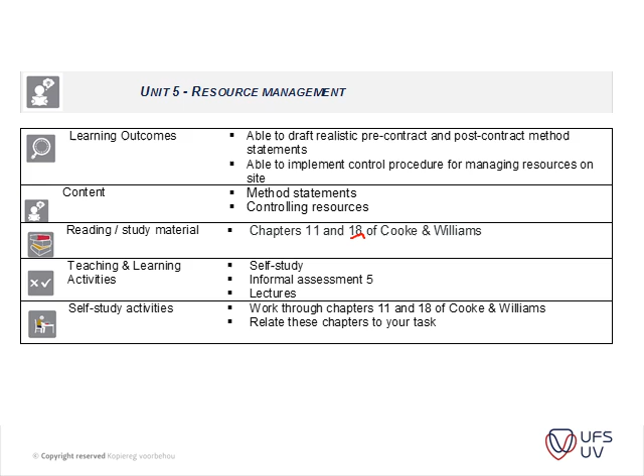So we're busy with Unit 5, Resource Management. That's where we are, and your task is due tomorrow, as discussed. That will be our semester 1 for this year. We've done a lot of tests, and the tutorials were more like the practical work we did. So just to look at where we are, we're doing chapter 18, which is our last one, looking at controlling resources.

Just as an introduction, your contractor's site manager has probably one of the toughest jobs because you can think of what he needs to manage. He needs to manage procurement, the program, the people, maybe like a marriage counselor to some people. You have quite a diverse job description. On site, you have to manage your materials, progress, quality, health and safety, and all that. Armed with a contract document, a program, and a health and safety plan, he has to manage the site. His goals are to manage time, budget, quality, and zero accidents. He also has to control project resources, considering labor, materials, plants, subcontractors, and preliminaries.

Labor we're going to look at can either be directly employed or subcontractors. Materials, he has to control waste. For the rest, refer to your study notes. We will only focus on the waste management contained in chapter 8.

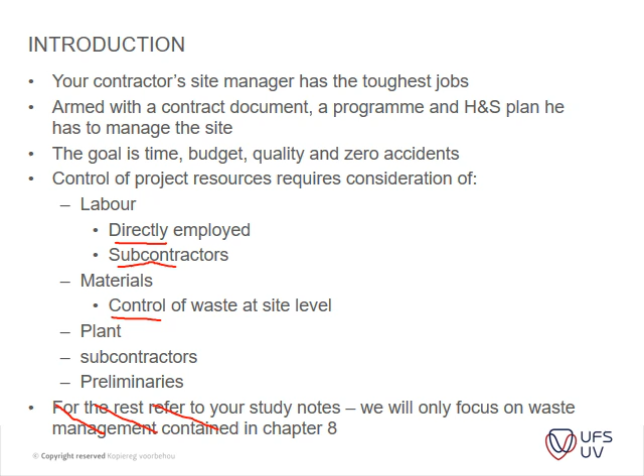So this is this little thing which I said crept in, so please just ignore that. Yesterday when I updated the notes, I saw that this was in. So that's just something that crept in.

Okay, so labor control. Like I said, you can either have directly employed labor or self-employed labor. In South Africa, it's not really self-employed labor, I think we've got a different term. We usually use labor-only contractors, guys that specialize in labor, which have the necessary insurance. They have their medicals updated, UIF, and all those items they look at.

Because you can imagine if you've got one or two projects and you suddenly have 100 people that you need to appoint, what do you do with them once the project is done? So that's where the labor-only contractor comes in. But your directly employed labor is usually the contractor.

Contractors like shop fitters and so on have specialized guys that do the work for them. For instance, that tender briefing we went to, they used tilers, plasterers. Many of the contractors will have that type of core staff on their list, the artisans and bricklayers also. What they might do is get a couple of casuals or people for that specific project to assist those artisans, guys that carry the bricks up to them. It also depends on the size of the contractor and the location.

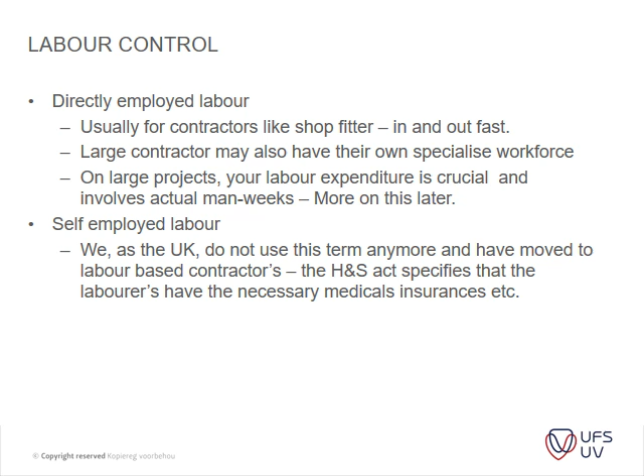Okay, so resource histograms - you did this in PQM, so I'm not going to go into too much depth of how your labor histograms work. But what I may ask you guys to do, there's an example in this book that I might post as a mini task for you to do. Don't worry, I won't do it now, I'll just check with you guys when you have a bit of time.

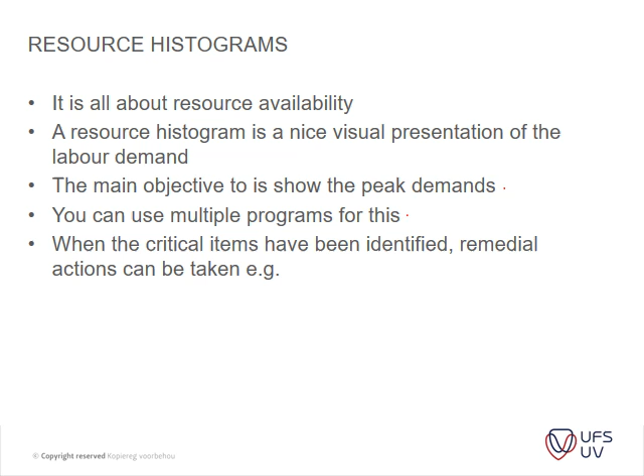When the critical items have been identified, remedial actions have to be taken, e.g. appointing more people, getting more machinery, or just letting the project run for longer. So that's the type of options that you do have.

Okay, so this one you'll probably recognize, this is from PQM from third year. I don't know if it looks familiar. It's a very simple histogram. It's a simple project where you have excavations, bedding, lay pipes, manhole excavations, manhole construction, install valves, backfill, test and commissioning. So it's a very simple little project.

But this is now your labor-only histogram. So you have 2 laborers in your teams that you can put on for trench excavation, so 2 people can work simultaneously in the trench. Your bedding, you can put in 4 people to work on that, and it takes them about 1 day.

And then you've got your manhole excavations, you need about this amount of people. Laying of pipes, you need 3 people to do that. And then you've got your manhole construction where you need 6 people, and so forth.

So you can see that all this is done on an Excel spreadsheet, and then you just add up the amount of people that you need per day. So the total amount of labor for day 1 is 2.

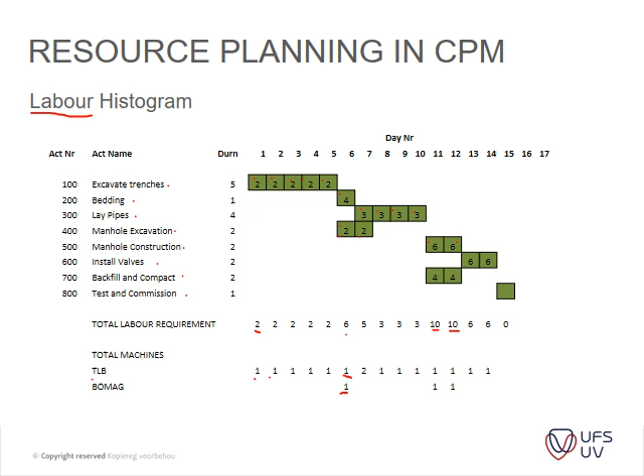Okay, so on your labor histogram, you can see we've got these 2 extremities here, but we know we only have 8 laborers available, so there's already too many laborers on that day. So you can see you need to do a resource leveling there.

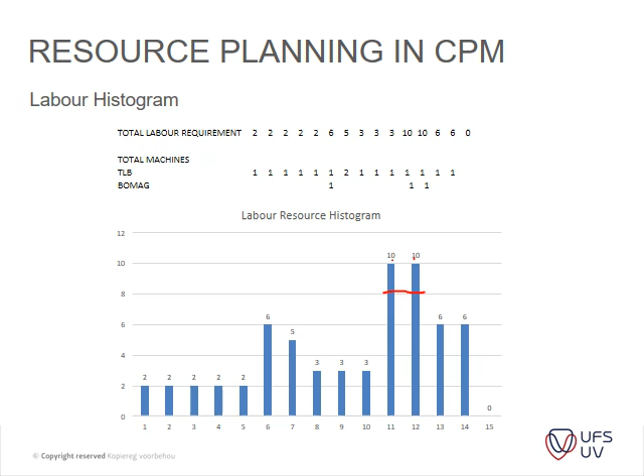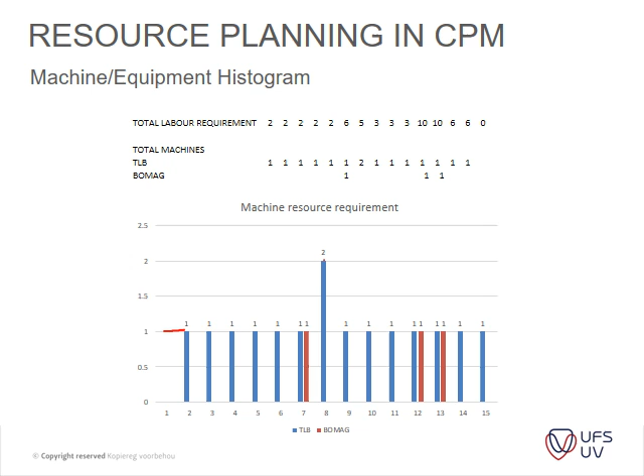Then with regard to the TLB, the same applies. You add it up, and you can see on which days you need what amount of machinery, and you can see on day 8 you actually need 2 TLBs, but you only have 1 available. So you can easily identify where you don't have enough resources.

Without going into too much depth, the simple solution is you just level out your resources and your TLBs, and what it causes is your project—I think it's the pipe laying—that just moves out one day, and together with your excavations, which moves the project by 1 day if you level it, and if you level your laborers to 8, like there.

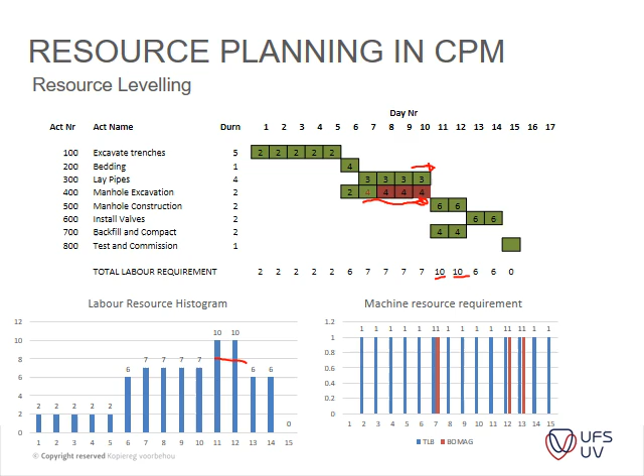Okay, I just want to see why it's still adding that up. Okay, so that's just a bit of a recap of how histograms work.

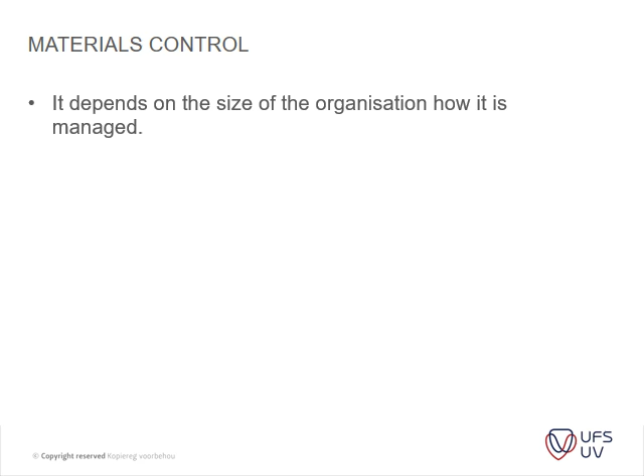And going further in materials control, that is on page 401. It depends on the size of the organization how materials are managed, whether you've got a central buying division, or if one person does everything.

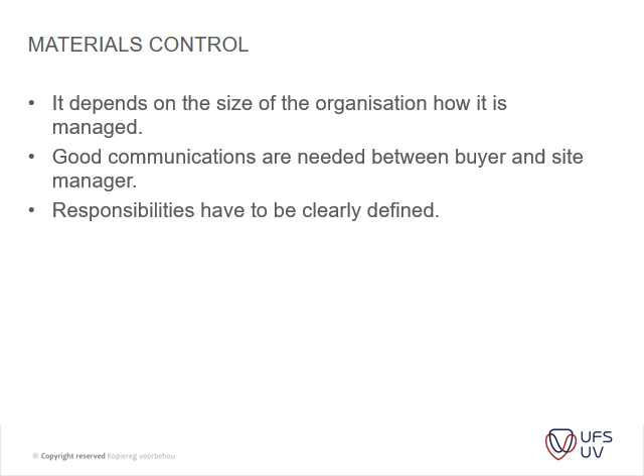Good communications are needed between buyers and site manager. That's very crucial. And then the responsibilities have to be clearly defined. Once on site, it's the responsibility of the construction manager to coordinate the communication. So that's something important to note.

And then site layout planning is crucial. That's where you're going to put your plant, where you're going to store your materials. And I think it's one of my next slides.

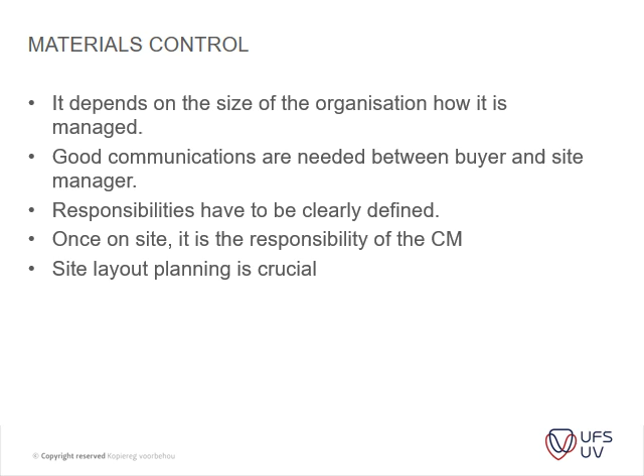There's a couple of things that you can immediately notice: if your housekeeping on site is done well, if you come onto a site and everything is nice and neat, you know they're managing their materials well. If you come onto site and you're falling over debris and bricks, broken bricks and so on, you know they're not managing their materials very well.

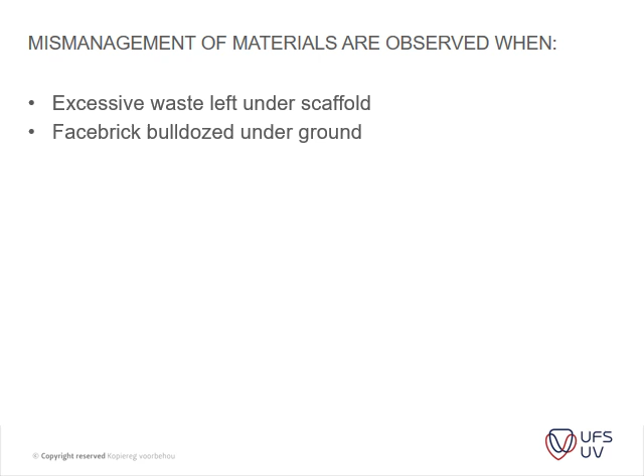Okay, excessive waste left under scaffolding. Here's actually the items which you can see. This is just a few examples. What you can see is excessive waste under scaffold, face brick bulldozed underground, material being stored on uneven ground, pallets of bricks and unloaded on unprepared ground.

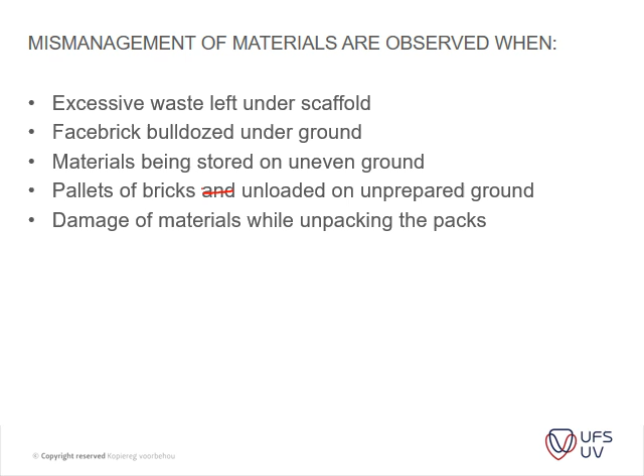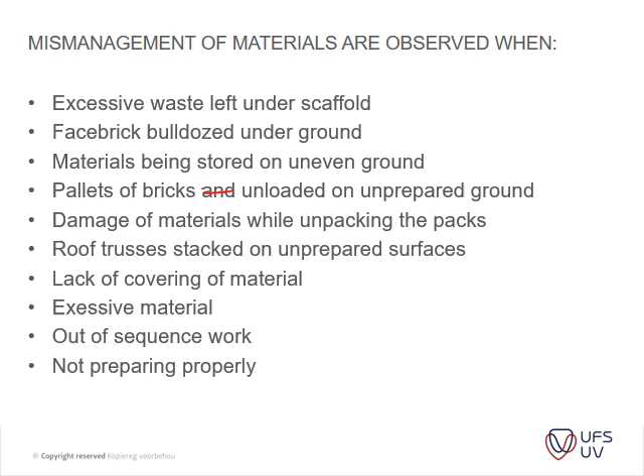This is supposed to be on. Okay, and then damage of materials by unpacking the packs, roof trusses stacked on unprepared surfaces, lack of covering of material, excessive material, out of sequence work, not preparing properly. So you can easily see when a site is not properly run, especially towards managing of materials.

Okay, then something which borders on that is waste. Historically, material waste was only a percentage on top of your rates. But these days, those percentages, if you're working on large projects, that percentage can be a lot of money in your pocket or a lot of money lost. So it is something that you need to manage very well.

New thinking suggests seeing it as a resource. The industry can benefit environmentally on performance and the bottom line.

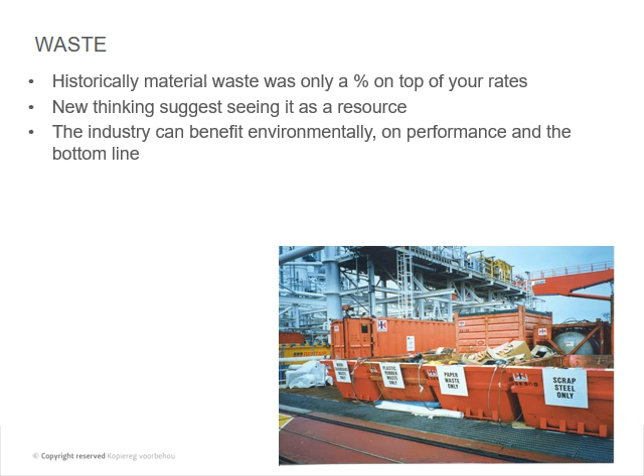Demolitions amount to about 100 million tons per year, that's now in the UK, so it's quite a lot. And then waste removal accounts for 4.5% of the company's profit. So just to put it into perspective, 4.5% is quite a lot. If you're working on a million rand worth of project, that's more or less 45,000 rand, which you could have saved or put into your pocket. So yeah, it's got a lot of money.

Then approximately 13% of all material delivered to site is wasted. That's quite a staggering amount. And that's just the waste of material. There's other items which you can manage well as well.

It's like your site offices. If you manage your tools and sheds and so on efficiently, the less containers you have on site, the less your overheads per day. So that's the stuff that you can think about.

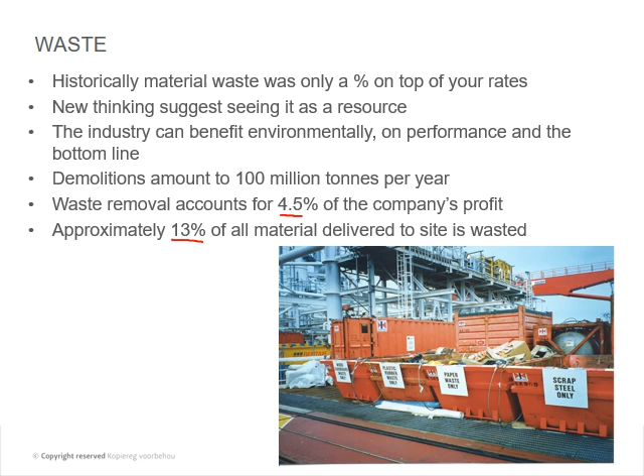The other thing is if you plan your site such that you use some of the original structure, the constructed building, to be used as storage, you can save that cost as well. So there's a whole lot of practical items that you can think of, how to save money by utilizing your progress on site and just being effective.

Okay, duty of care: the construction and demolition waste streams have been prioritized by the environmental agency. So it's basically once you've demolished something, you need to get it off site, you need to plan for it. That's the short and long of it. You can't just demolish something and not have a plan of how to clean your site. Waste streams should be managed safely and without risk to human health.

And then the waste may consist of metals, asphalt, tar, concrete, brick, tiles, etc. And there's actually money to be made out of some of these demolitions. Sometimes you can sell your hard...

Or some of your — I can't remember what it's called in English now — but some of your demolitions you can use for fill in other areas. If you've got a contractor that has a lot of fill to do and he can use that demolition work, then you can actually sell it to them. So remember that, don't just pay money and go and dump it at the nearest site. You can actually save or make money from that. Like for instance, your tar waste, you can reuse for other applications also.

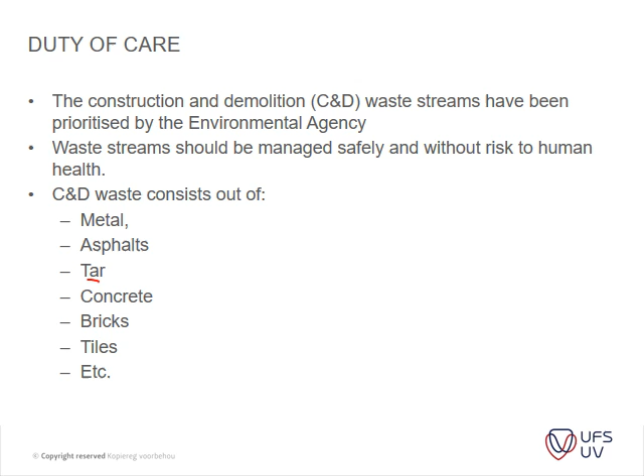Okay, duty of care. Construction and demolition waste is normally classified as commercial or industrial waste. Hazardous waste, which requires pre-consignment, is for instance your asbestos, chemicals, oils, contaminated soils, and so on. I've worked on one project where we had to take off asbestos. It's a schlep. There's only like 4 contractors in the country that do it, so it's a highly specialized job, and they usually ask a lot of money for it.

So if you're doing the pricing on a project and you see there's asbestos, immediately start asking questions: is there enough money allowed for it? Identify it as a risk whenever you're pricing your documents. Okay, then we have a legal duty of care. If we know that we're going to work with asbestos, the other risk is your laborers, exposing them to that.

It might not be that your personnel picks up a little strand of asbestos on that specific site, but 5 years down the line he gets asbestosis, and he says, oh, I worked on that project, that's probably where I got it, even though he might have got it from somewhere else. So just see it in that light. So you've got a duty of care to actually look after your personnel's health.

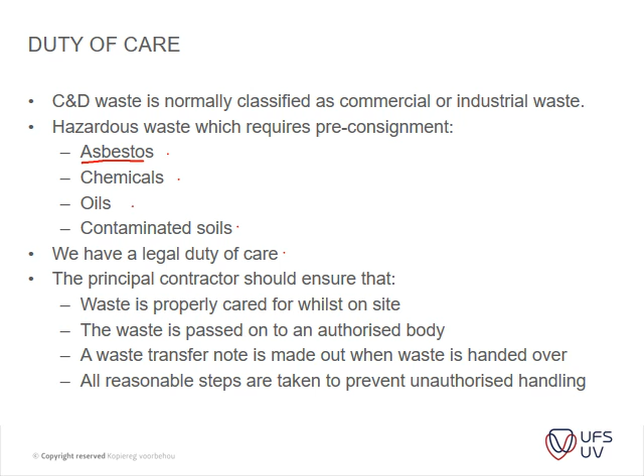Okay, then the principal contractor should ensure that waste is properly cared for whilst on site. Waste is passed on to an authorized body. A waste transfer note is to be made out when waste is handed over. All reasonable steps are taken to prevent unauthorized handling.

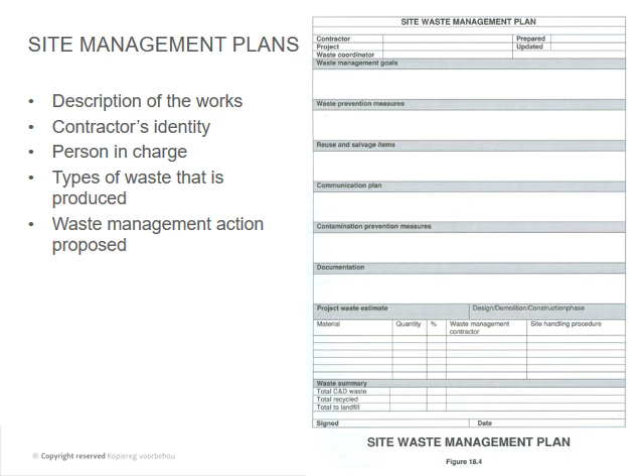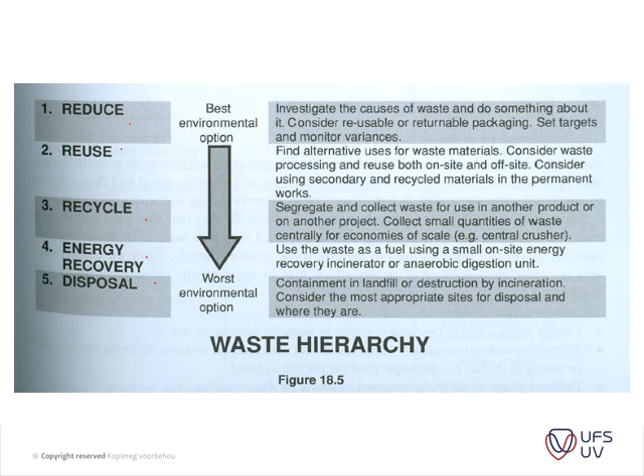Okay, site management plan. Here's a nice example that you guys can use. It's description of the works, contractor's identity, person in charge, type of waste that is produced, waste management action proposed. So pretty straightforward, you guys can have a look at it. Okay, a waste hierarchy. Waste can either be reduced, reused, recycled, energy recovered, or disposed of. So that's also a nice little question to ask on waste. And obviously you need to explain what each one is.

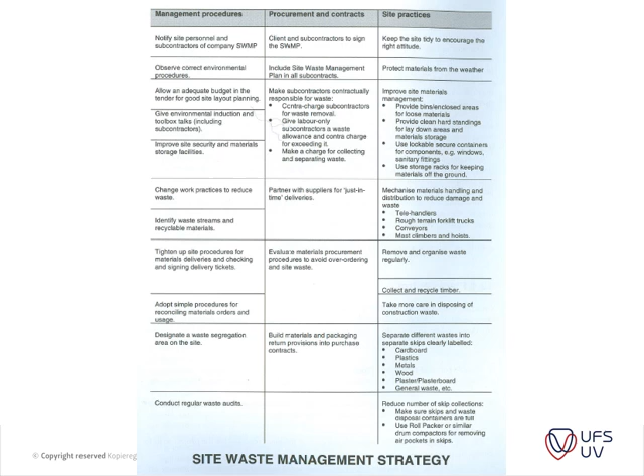Okay, then improving your management of waste. Managers have to be proactive in planning and managing materials, ordering, delivery, handling and storage. Waste is caused by design waste, takeoff specification waste, delivery waste, site waste. Waste management should be integrated with everyday thinking. It will have a positive impact on the contractor's profit margin. Materials have to be managed properly. Incentives to managers have to be put into place, and company materials management policies, etc. It will prevent health and safety problems as well.

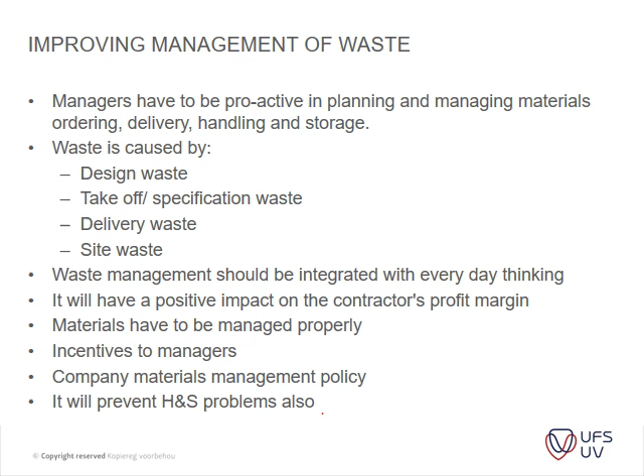Okay, then we get to subcontractors. This is now very important for me. You've got subcontractors, you've got pre-tender planning, and then you've got during-construction contract planning. So figure 18.8 is important. It shows the relationship between your planning and your actual control on site.

So firstly, if you think back to our tender briefing last week Friday, those guys will have to obtain quotes now from their suppliers, so they're at this stage, and then they need to compile the shortlist, subcontractors register, subcontractor selection criteria, obtain quotations. If it's a large company, usually those guys have to be on their vendor lists. So if it's something specialized, they've got a whole lot of red tape to get quotes from other guys and get them onto their registers.

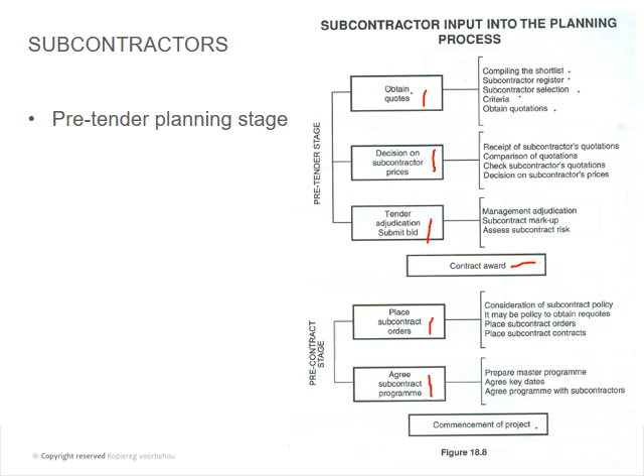Okay, so this is also very important, the information contained in here. You will see in your books there's a whole lot of checklists. Just read through those. But the most important items are actually contained in these figures. So again, going back to my rule of thumb: know the headings, and then you can hold on to that. In Afrikaans, ken jy opskrifte gorrel die res. But the main thing is, if you need to gorrel, you need to understand.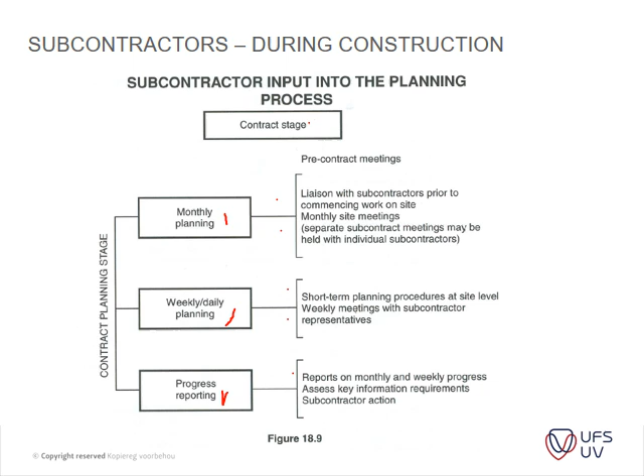Okay, subcontractors continued. These days, subcontractors may be responsible for their own program, and they are. For instance, on Amelia, where we worked, the plumbing contractors had to submit their own program, and that had to slot in underneath the main contractor's program.

Then it's a good idea to keep stock of the price, quality, workmanship standards, cooperation and time program performance of subcontractors. I've seen guys with vendors and subcontractors actually have a scorecard and a rating on them, so they can move up and down, and that's usually very confidential information. In large companies that's very crucial information, because if you're working on large projects and have to evaluate a lot of subcontractors, the guys usually look at their ratings for this guy in this area and so on. So it does become quite complex.

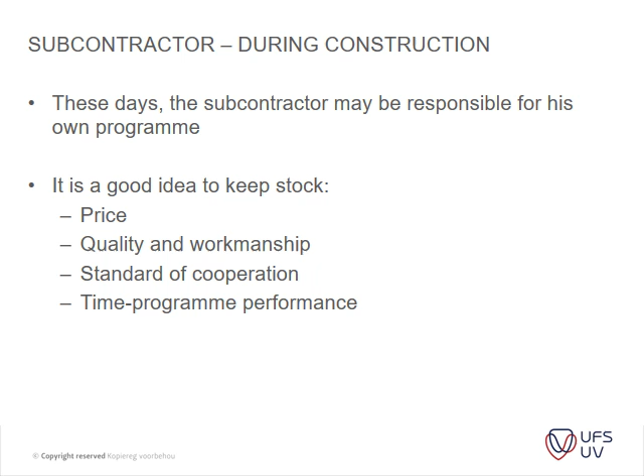Okay, and then just an example. I think we've touched on this. This is not that important for me, but the work package master program, package stage program, and then a work package six-week program. So it's just going into more detail. It's not too important for me.

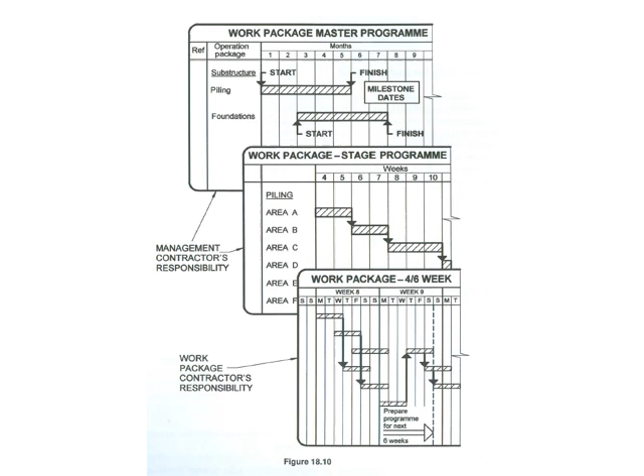Okay, then subcontractor liaison meetings. So you've got your program: monthly progress meetings, two-weekly short-term planning meetings, one weekly meeting, and then your daily planning. Your monthly site meetings coincide with main contractor meetings with the architect. The purpose is to review progress, overview, variations, basically reporting to management.

And then your two-weekly meetings are more on technical items, short-term planning, implementation on one- or two-week cycles. The purpose is to resource the short-term period, review and monitor progress, liaise with other trades, progress reporting at weekly intervals, etc.

What's liaison in Afrikaans? Correspondentie. What does it mean? Liaison is basically working together. If you liaise with someone, you speak to them, you communicate, and you do stuff together.

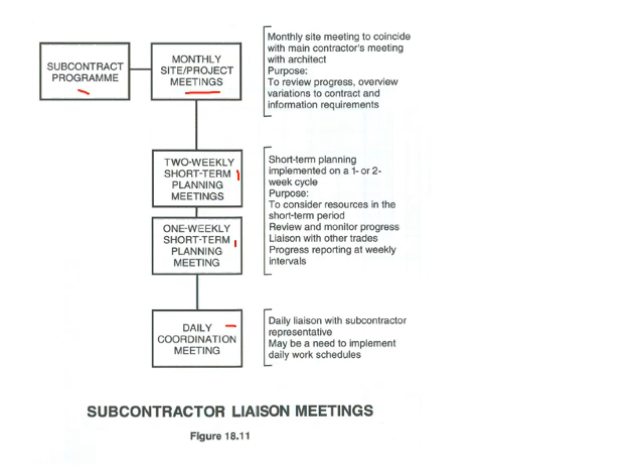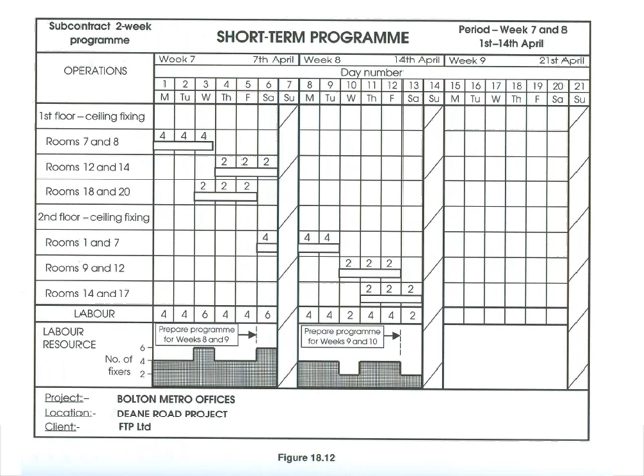Okay, then the last one is the short-term program, just another example of that. That's also not too important. Next semester we're going to do programming in detail, so then we're going to cover all these areas. Okay. And that's it. Thank you.